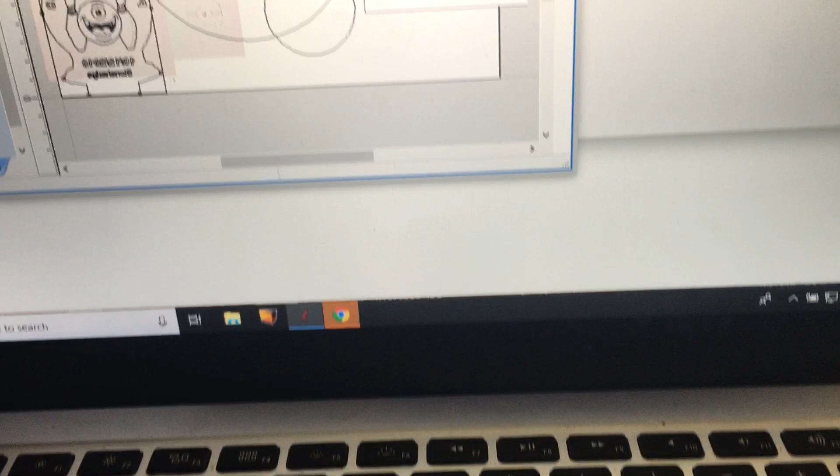Hi there, my name is Robert, and on our group, CNC for Beginners, I had some questions about how I was making my LED backlit signs. This is not going to be a professional level thing, but I thought I would share how I did it. I use Aspire to do my drawings.

This is my second CNC machine. It's a Shapeoko XXL, and I am super happy with it after having it running now since midnight last night. It's now noon, so I've had it running for 12 hours and I'm super happy with it. So let me tell you about making these LED backlit trophies that I'm making. That's the design I'm going to do right now.

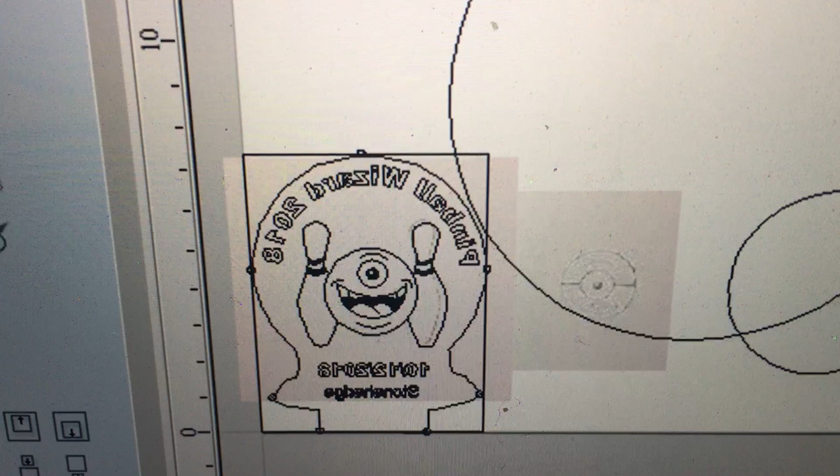Okay, you can see a box around it, 4 little dots here, there, or 5 or so. Okay, I'll explain what those are. Let me get the mouse up here. There's a box around it. There's the trophy outline. There's the lines. There's the words.

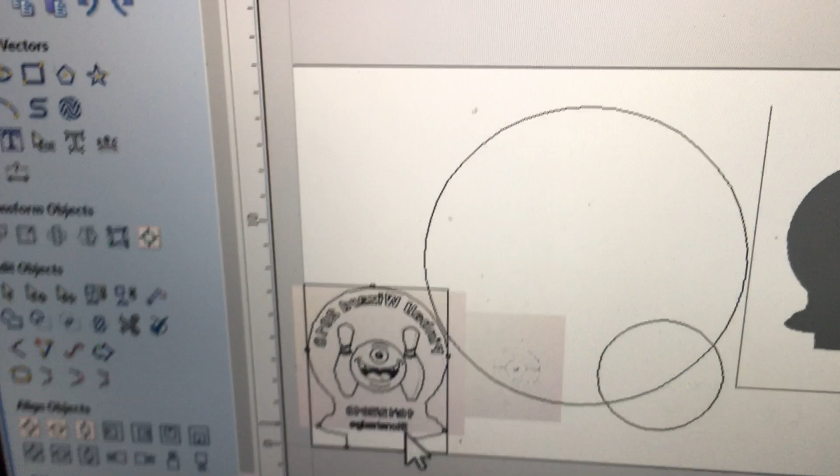Now, what I did, I had to make a full dozen of these over the course of the year, one a month for this pinball tournament that I run. So this is going to be my 10th one. Not knowing how to really do it, what I did was I ordered a case of trophies in this shape from China. Shipping on it was like 70 bucks. Got here in a couple weeks.

Okay, each one comes with a base, USB cable, a remote. The base changes colors, has 7 or 9 LEDs in it, and it comes with the trophy already cut to shape. Now, one of the first things I learned, and the reason I have to do the little drawing, is that the trophy itself is not symmetrically cut.

That's the right way. If I flip it over the other way, the left side is low and the right side is high, or vice versa. It doesn't line up the same when you flip it over. So one of the first things I learned is that these things are not symmetrical. This right side sticks out farther than the left side. If you look at it there, you can really see how it's not symmetrical.

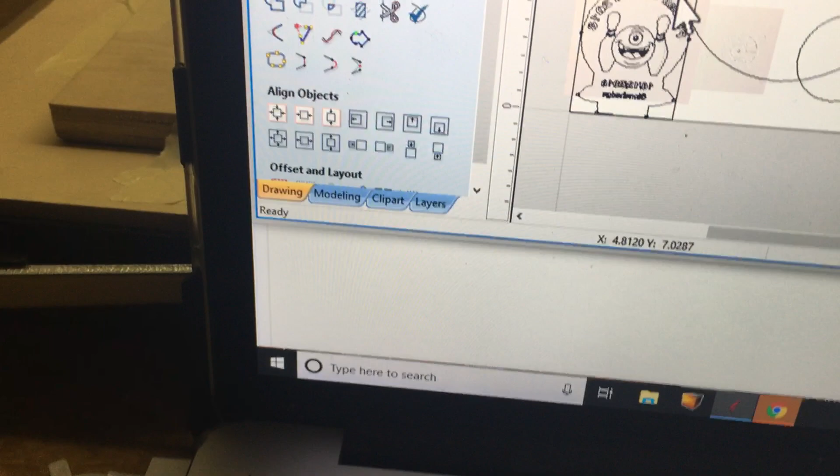See if I can make it zoom. I normally use a mouse, but I don't have the mouse down here right now. This is in my basement. Okay, that was interesting. Okay, I think if I hit this, it centers it again. Alright, well, there's the design.

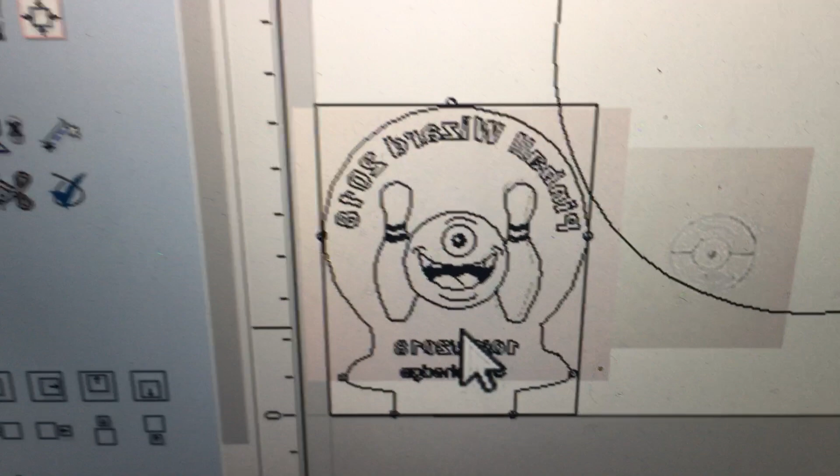Now, in Aspire, you go over here and you make your tool paths for what you want it to do. I'm going to click this so it stays open. Okay, and I already have the tool made. Quick letters, that's going to be those letters. Monster, this is a pin monster. That's those lines. And there's the trophy outline.

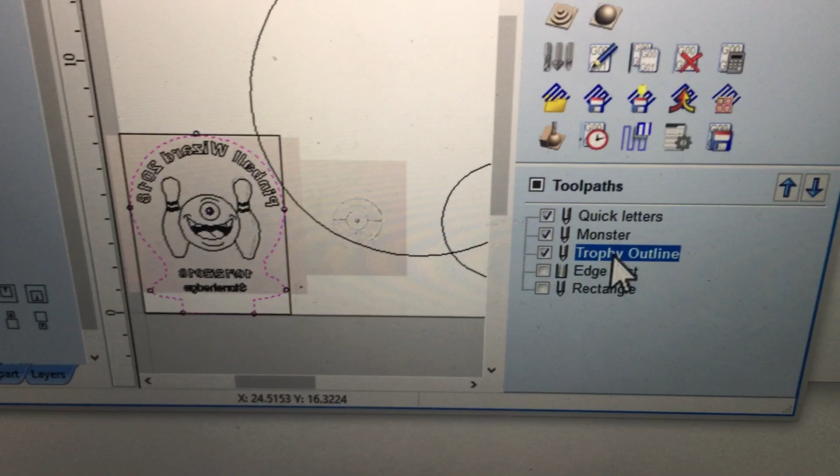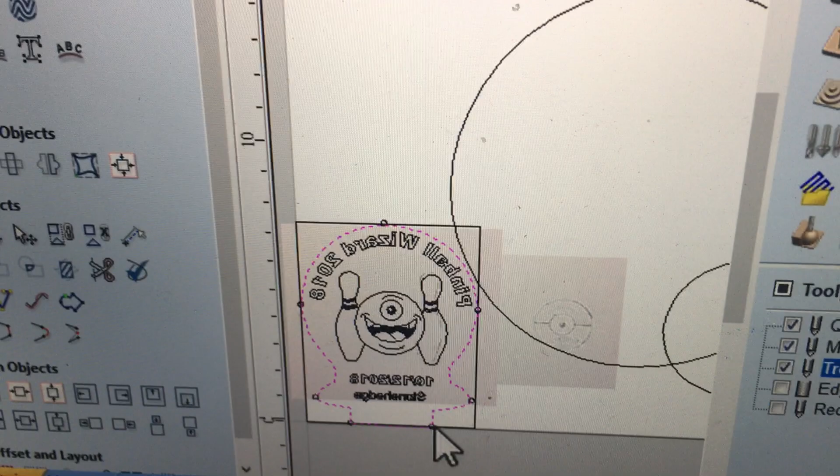Now those circles I made right there, I will also sometimes export that, set my Z up a little bit extra high, and then run it through a drill program and watch. This was with my old machine. I had to do this because it didn't zero right all the time. It was awful. But that will actually tell the machine to just kind of touch each of those points for me.

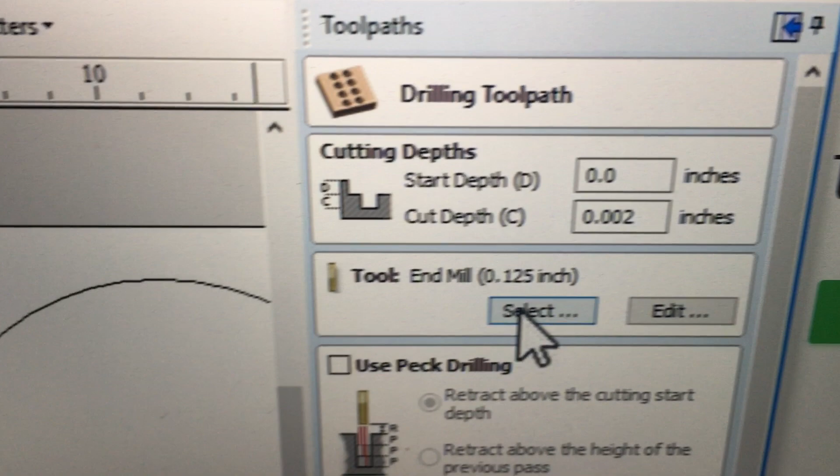And I call that the edge test. Okay, and that's set at 0.002. I don't want it to actually touch anything, so I set the Z up a little high. It's an end mill, it doesn't matter, and it runs through that program, and it tells me that I've actually got the thing laying down correctly.

Now, I did one of these last night. I'm not going to have to do that. I'm putting it in exactly the same place, because on my wasteboard, I actually cut that rectangle, and I cut the outline of the trophy. See that line right there? That's the outline of the trophy. So I line that up ahead of time, and now I know when I zero to the corner, everything's going to be lined up in that workspace.

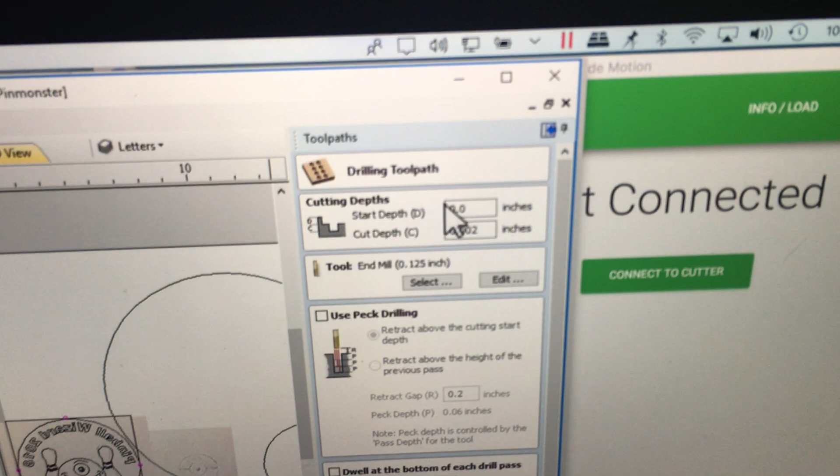So that's kind of my beginner, make sure I do everything right thing that I do. Okay, so let's go ahead and close this.

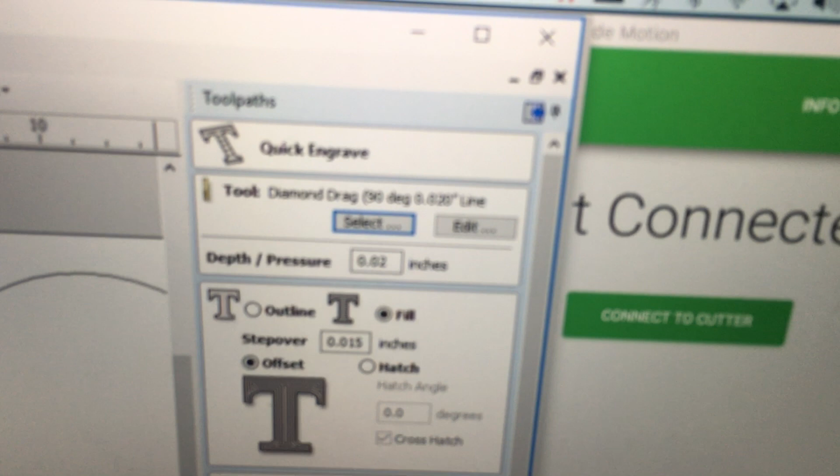Now, the quick letters, that's actually this toolpath, quick engraving toolpath, and it is set to 0.02 inches, fill, 0.015 inches step over. Now I'm actually going to export this in millimeters, so it'll do all that conversion and stuff for me. The bit I'm using, you have to tell it what bit you're going to use, and

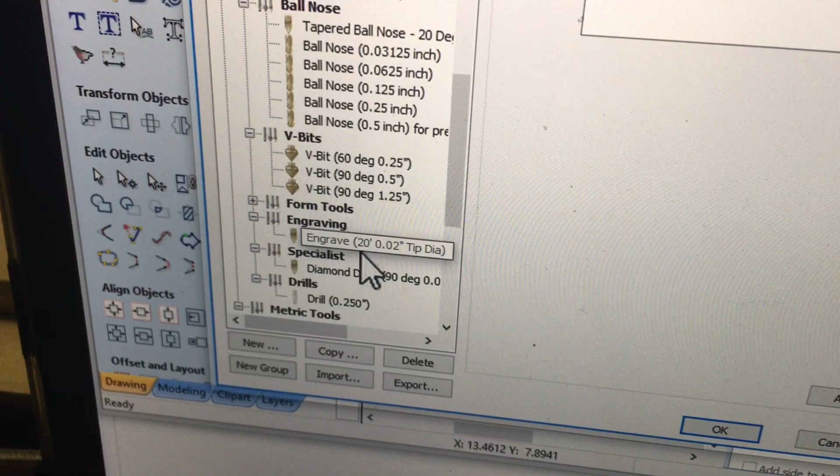if you go to select in this program, come over here and you got all these bits to choose from, and down here in engraving is the diamond drag 90 degree, and I actually had to import and make that, and I don't have time to tell you how to do that right now. So I'm going to cancel that because that's already what I want.

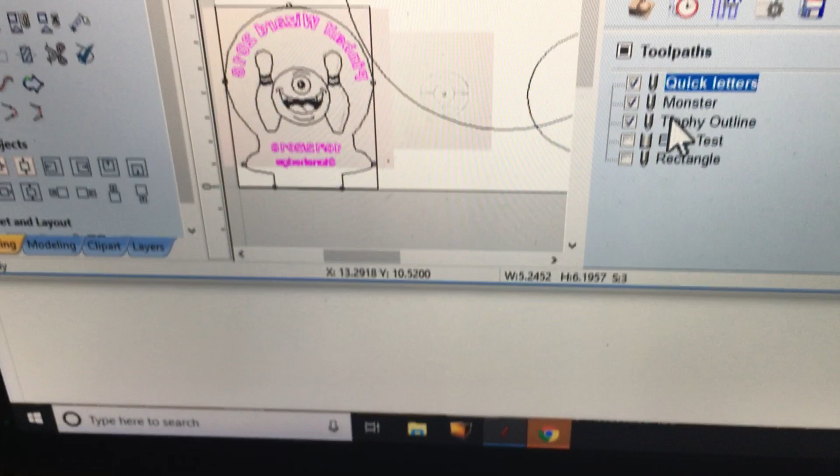And then what you would do is you hit calculate, and it would calculate that toolpath for those things that are pink right there. Okay, don't need to do that right now because I've already done it. Then the monster toolpath is the same tool, same depth, 0.02 inches, but it's an outline. So it's just going to draw the outline of those things.

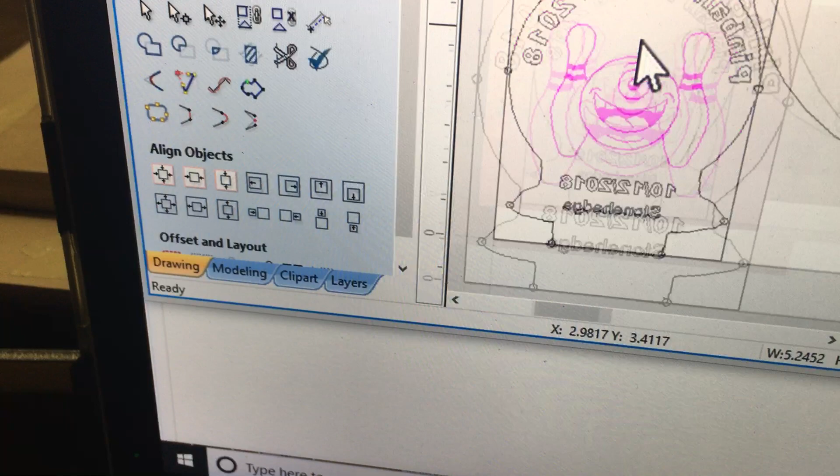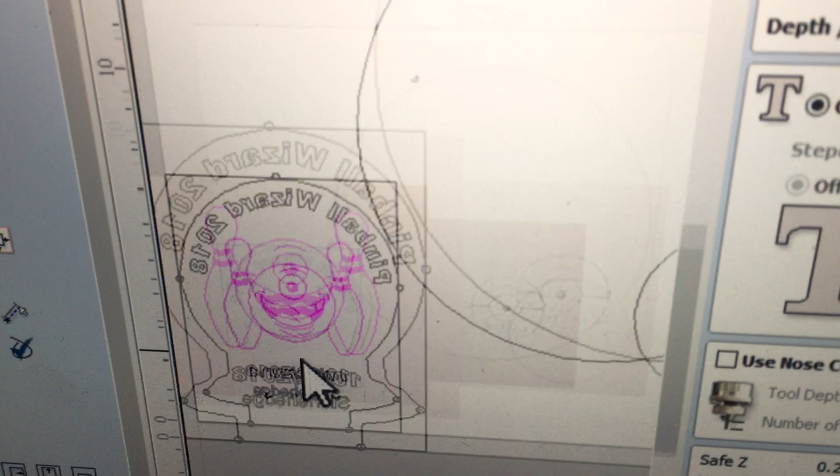And when I did this, boy, it's really hard to do this with a mouse. To do the lines there, I actually copied this top line and nudged it down and moved it down, and then made all those lines by hand. Same thing with the eyeball up here. Okay, so those are not a fill, those are actually individual lines that I drew for this area, and that area.

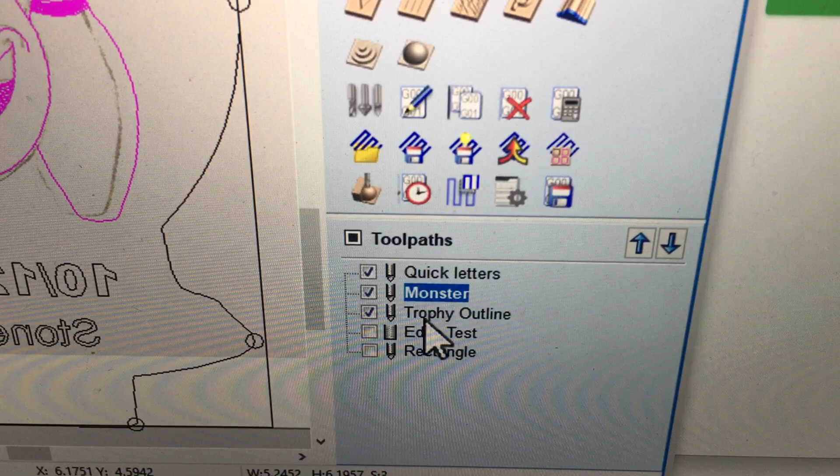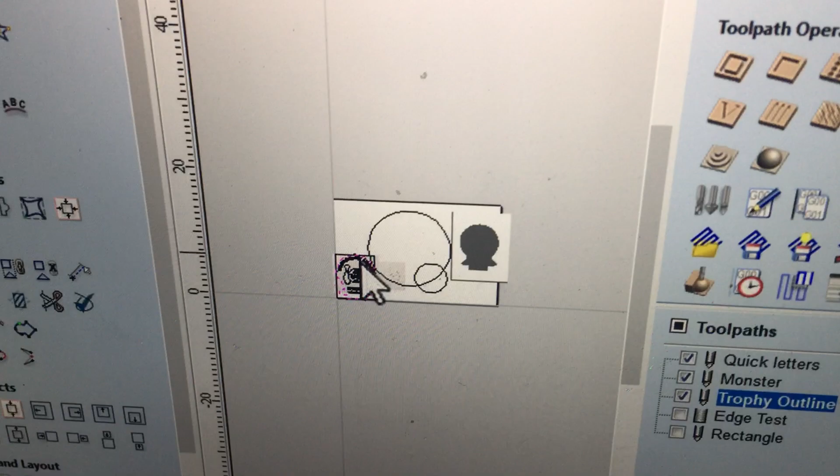Okay, and so I made that quick engrave outline, and went ahead and named the layer monster and all that, calculated it, and then the trophy outline. I always leave the trophy outline on there because that helps me make sure that the work area is defined the way I want it to, because I also work on vinyl records and do other stuff, so it doesn't export your entire work area. It only exports the work area of what you are working on. So I make sure I do the trophy outline so that it has the work area that I want.

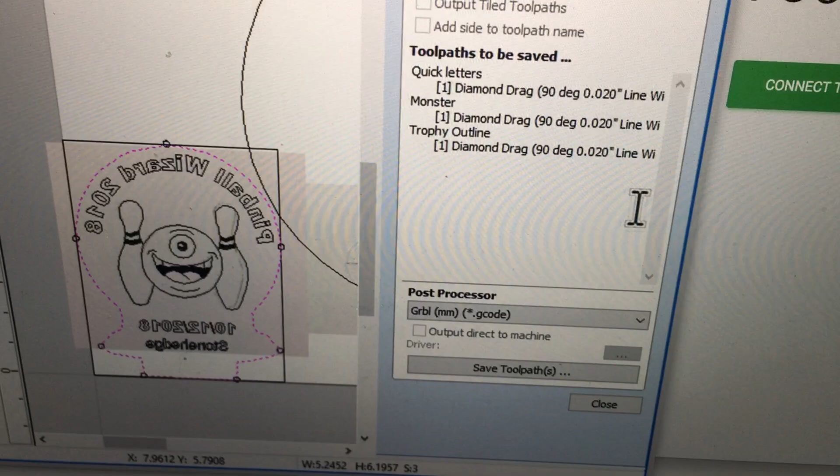Okay, so when you're ready to export your toolpaths and send them to the machine, in this program you go to the Save Toolpath, you click that, you then look at the toolpaths that you want, and let's close this here. Okay, so I have quick letters, monster, and trophy outline. Now this also does it in the order that you have them listed here. If I wanted to do the trophy outline first, I would move it up to the top, but I'm actually not even going to run that.

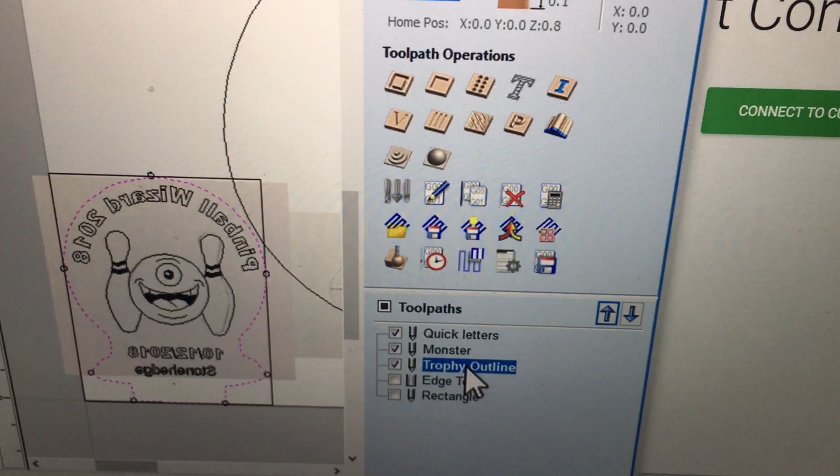I'm going to stop the program when it finishes with the monster, and then the trophy outline itself is just there, so that I stop the program at that point and don't run that. It doesn't necessarily hurt to run it because I have it set so it just barely even touches the surface of the thing, but I don't actually want that to run, so I have to be here to shut it off when it gets to the trophy outline.

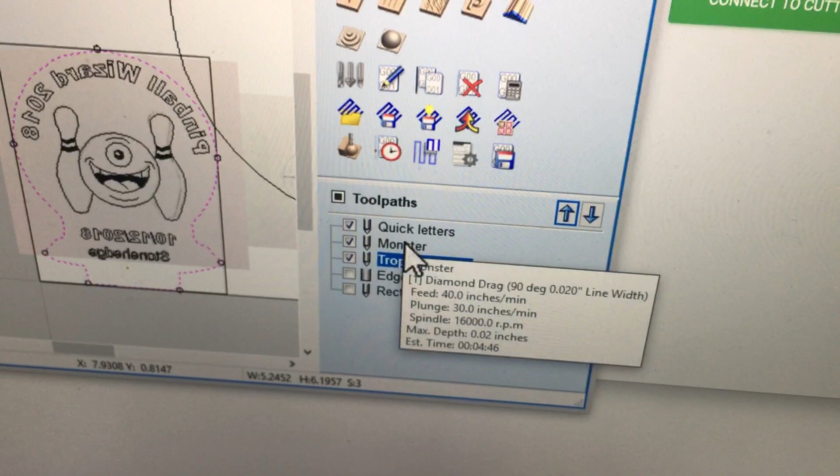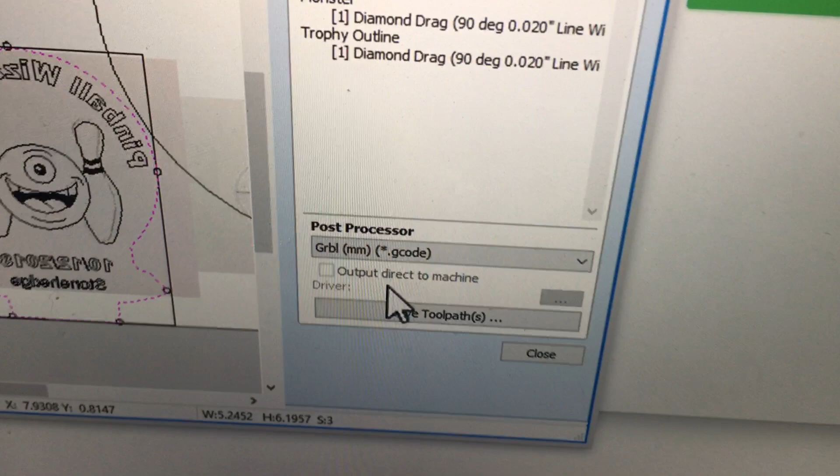Okay, so I've selected those three things. I go to Save Toolpath. It's going to tell me the three toolpaths I want, and they all have to be the same tool. I want to output all of them to one file. Okay, and then I would hit Grbl millimeter G-code for this machine. You would do whatever you need for your particular machine.

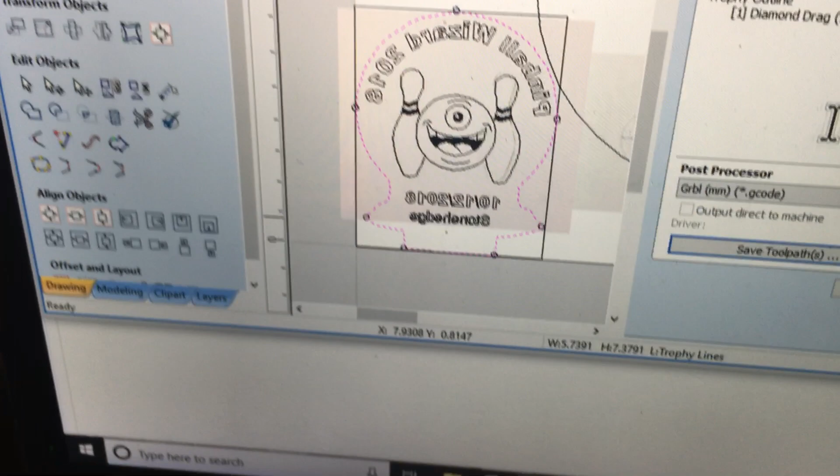Save toolpaths, and then it's going to put it in a place, and I've got it here as the October Stonehenge Trophy, which is what this trophy is titled. Okay, and then you would hit save. Now don't need to do that because I already did that and it's all ready to go for me. So then you go to your Carbide Motion for the Shapeoko. All right, I'm going to clear off my workspace here.

Now I'm doing this for rank beginners who have even less experience than me, which has got to be a pretty good beginner, but people have been asking some pretty pointed questions, and I thought it might be helpful to share what I have learned over the last 10 months of fighting with an inferior machine, and now I have this wonderful machine that just does everything the way I want it to do.

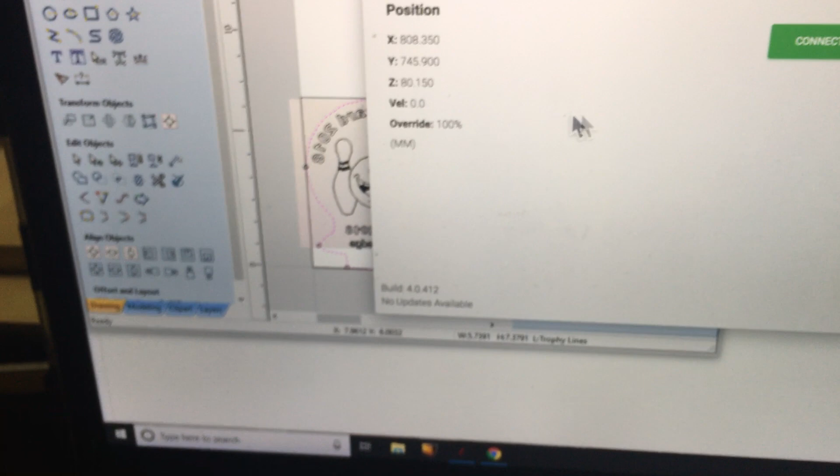So I have to turn on the machine, and it will react over there when I did it. It made a little clunk and says, okay, it's happy. Okay, and I'm running a Mac, and I have Parallels going, and I want it to connect to the Mac. I don't want it to connect to the Windows. Okay, so then I connect to the cutter. Okay, it found it. Now, I'm going to, just for fun, go to the jog program.

Okay, I have to initialize the machine. It's not just for fun. And it's going to go through the homing cycle. So it's over there. It already moved up to the Z-axis. And it's homing. It's reminding itself where 0, 0, 0 is. And that's an important part of the process.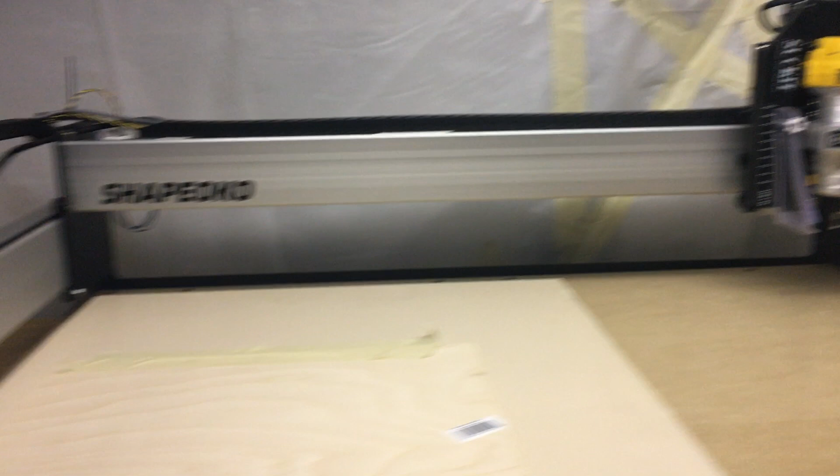Then I can go to rapid positioning. And this is northwest, north, northeast. This is coordinates on the full-size board. So when I push this button right here, the machine's going to just come right over to me.

That plexiglass hanging down there is for the socket, which we don't need for this particular process. I brought it over here to me, and you can see that I have the diamond drag bit already installed.

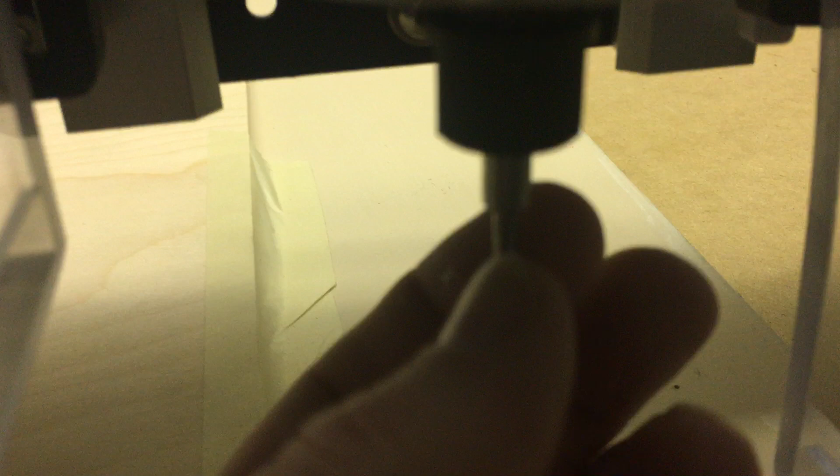It's right here, and it's still got the dust on it from last night — that's just loose dust. I'll just wipe that right off.

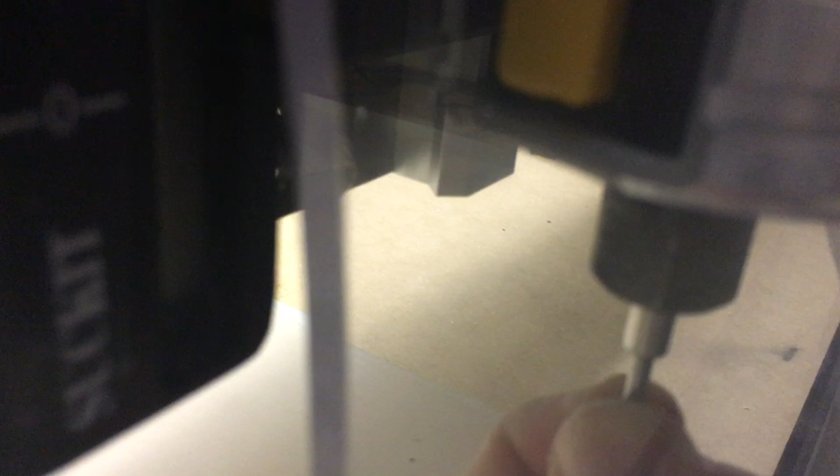This is spring loaded — you can see it, spring loaded, moves in and out, so you don't have to have your zero and everything perfect. It works on uneven surfaces and keeps a constant pressure based on the spring loading.

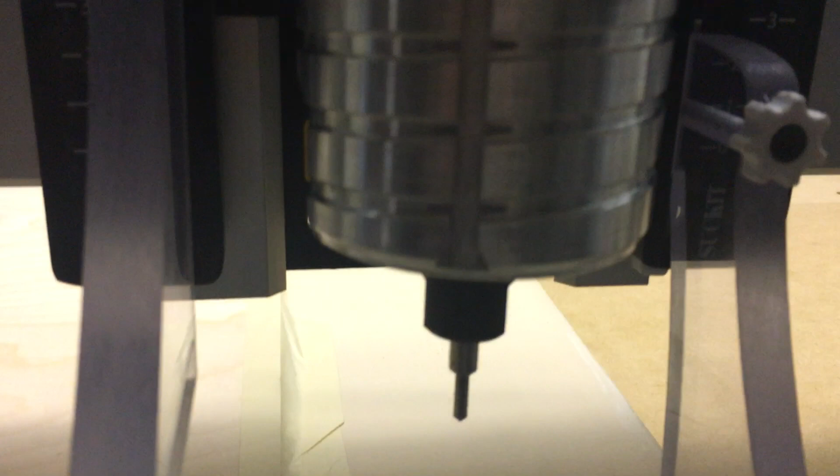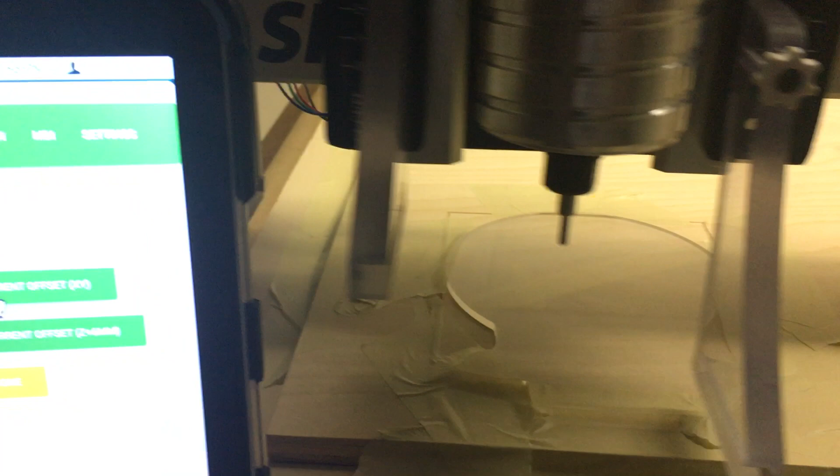Now I'm going to manually zero the machine. Actually, I can tell it to go to the current offset of XY, and it's going to go over to where I had it zeroed last, which should be the corner — right there on the corner.

I'll take my thumbnail and push in the tape — that's way down here actually. Sorry, like I said, this is for beginners. There, right there is the corner of that box that I have etched into my wasteboard.

Now I'm going to go ahead and go to current offset of Z, and it should just go right down there — it says plus 6 millimeters, so it's going to stop 6 millimeters above where I had that X before. Now I'm going to get off of the rapid positioning and go to the regular positioning.

For the Shapeoko program that's here, you can go 0.1 millimeters, 1 millimeter, or fast — with fast, it just moves as long as you hold the button down. You've got to be careful with that because you don't want to cram anything into anything else.

So I'm going to get down back there close again. I'm confirming now that it doesn't look like it came back to exactly the same spot, so I'm going to change my increments here to 0.1 millimeters.

I actually drew on my wasteboard, since I'm still new at this: Y minus is this direction, X minus is that way, X plus and Y plus are that way, until I get used to this particular machine.

So I'm going to hit the X plus button right here. Every time I tap it, it's going to move 0.1 millimeter. It doesn't even — you can't even tell it's moving, it's going to move so small. Tap, tap, tap, tap, tap.

Now I've built into my design kind of a margin for error on these trophies. They don't have to be perfect because nobody's ever going to notice.

I'm going to Z minus, and I'm going to go down and make sure — I'm actually going to touch that. Now, that Z, my Z0 is actually not this point. So see, I'm right down there nestling into that corner. I'm happy with that corner.

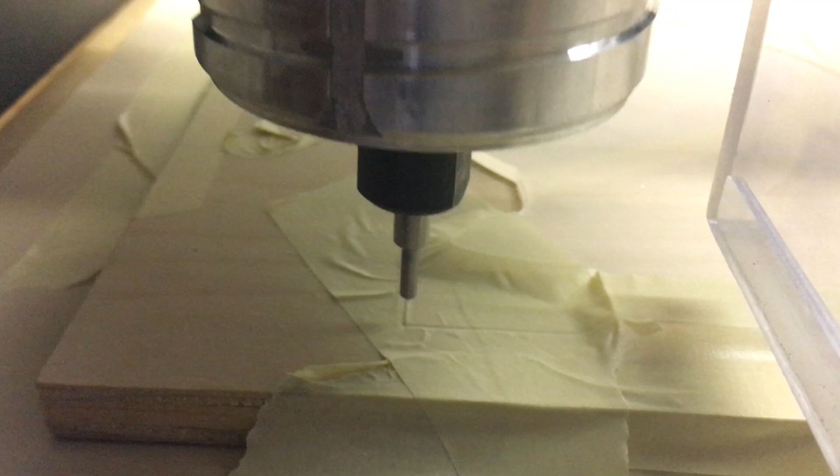Now I'm going to go back to Z plus. I'm actually going to go back to a full millimeter at a time so I don't spend all day tapping, and I'm going to send it back up again. Okay, so that is X and Y0.

I'm going to go to fast now, and I'm going to move back over here. I want to show you — I'm going to move back over, and where I actually zeroed my Z0, that's hard to say, is over here. So when I hit the Z minus...

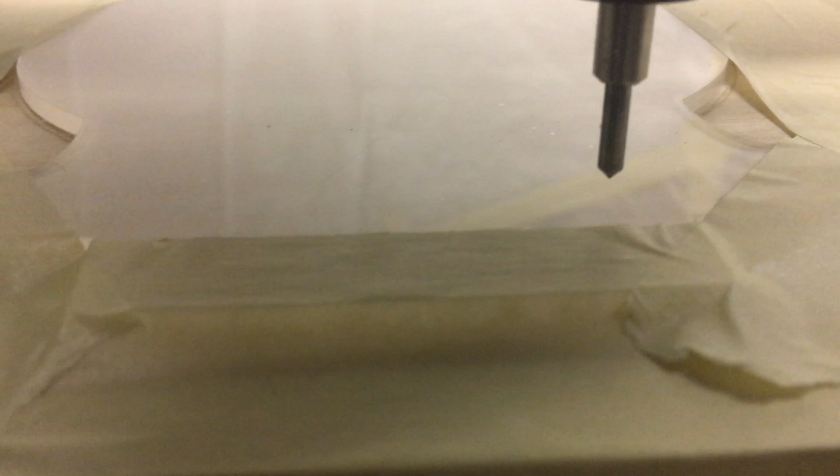Now I'm going to go back to rapid positioning again, and I want it to go to the current offset of Z plus 6 millimeters. Okay, and that's actually where it is.

So when I go back to this again, increment plus, minus — excuse me, 1 millimeter — I should be able to tap it 6 times and it should come down and actually touch. I'm going to zoom it 1, 2, 3. Well, that's moving fast — this is why you confirm it each time you do it. I want it to just touch.

There, it's just touching. Okay, now because I have this spring-loaded thing going on here, I want a little bit of room to grow on. So I'm going back to 0.1 millimeter again, and I'm going to Z minus it.

2 more times. Okay, now when I go back to rapid position again, it's actually going to tell me that I'm at X 100.1 millimeters, Y 22.25 millimeters, and Z 1.8 millimeters. So I'm actually still above where I had it set last night.

So if I go back to 1 millimeter, hit Z minus again. Okay, now it says 0.8. I'll go ahead and hit Z minus again. Now it says minus 0.2. I'll change my increment to 0.1.

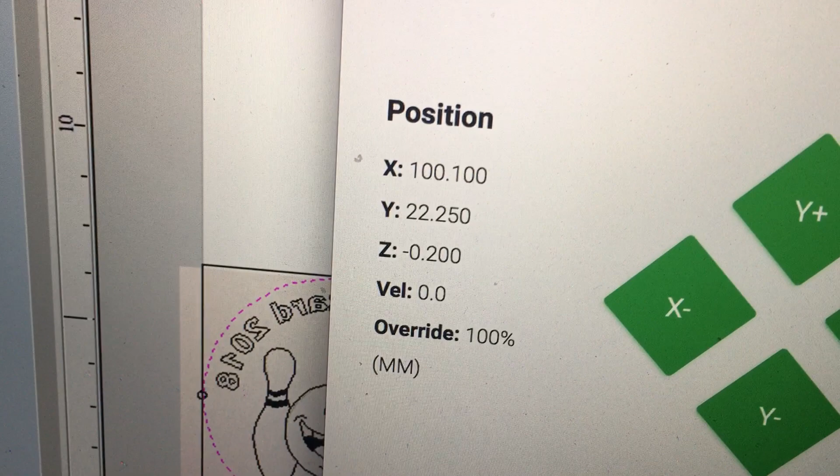Z plus, plus. Now it's exactly where I had it zeroed for the one that I made last night. And that's actually deeper than where I had it last night. I don't want it that deep. So I am going to go back up to 2 again.

And I'm going to look really close. Yep, that's definitely touching over on that side. Now, I haven't finished my wasteboard or anything yet. I need to get these trophies done. So I needed to just go in and do it.

So last night, this side was a little higher than this side, and so I zeroed it over here on everything that I did. So I think I've got a low spot in my board on this point right here. That's why I'm zeroing it way out here for the Z0.

Now I'm just gonna go. So it's actually zeroed. It's at 0.2 now. Okay, I'm gonna hit set 0 here, and I'm only gonna set the 0 Z. Now that's the new 0 point for Z, but the XY 0 is still over here to the left at the corner of the thing.

So when I hit done, go back to fast, I Z up. When I go to rapid positioning and I go to current offset XY, it's going to take it over to that 0 point. Current offset Z plus 6 millimeters is going to take it down to there.

Now see, that 0 point is actually way above the surface, but it's in the corner where I want it. So the machine now knows that the flat plane is there, the top of the Lexan or acrylic, and the XY0 is over here. I know that was a long explanation, but it sure would have helped me if someone had explained all that junk to me when I started.

So now we'll go back over here. We'll get out of the rapid positioning. Okay, now an interesting thing to know about it is that at this point, seriously, now that I've set those points, it seriously doesn't matter where the machine is when you start the program.

So I'm going to load a new file. I'm going to go over here to desktop. Okay, I don't want you guys to see what's on my desktop, so I'm going to hide something, I'm not going to look at it for a minute. Okay, yeah, there's nothing there. It's personal information. So I'm going to double click the October Stonehenge.

Okay, and it's going to tell me that it's good. That's how big the file, how many millimeters it overall covers. All right, so the next thing, all I have to do next is go to run. And I didn't talk about feed rates or any of that kind of stuff in this. This is just the process of making the thing.

And then I'm going to hit start. Now, as you can see, it's just out there in the middle of everything. I'm not going to show you clicking start. I'm going to show you what happens when I do it over here. Now, the spindle doesn't have to spin because this is a pressure and a drag.

You're scratching a diamond across the surface is what's going on with this 90-degree diamond drag bit. You're dragging a piece of diamond across the surface. There's no spinning. It's nice and quiet. Not a lot of dust gets kicked up. And now I'm going to click start, and this is what happens.

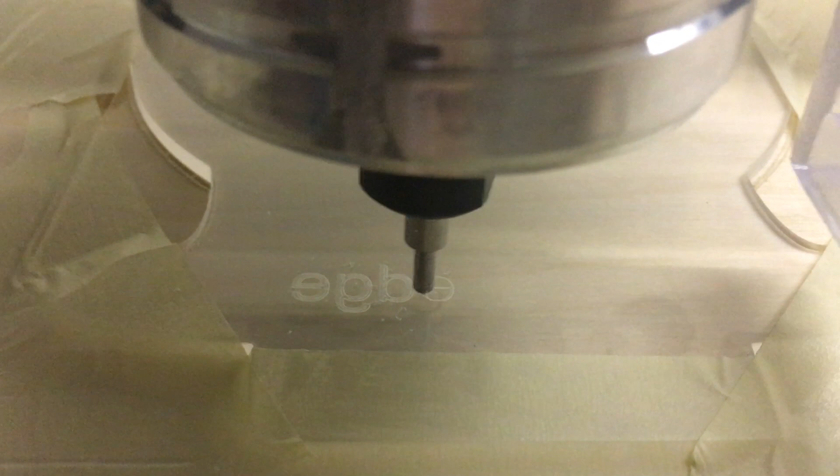Okay, the one that I made last night, I wasn't entirely happy. I had the offset set at 0.02 instead of 0.015. And these smaller letters down here didn't really have a good etching in the center of them. I should get that out and show it to you, but I'm probably not.

But now you can see that it's actually filling it in. What it did was it made an outline, and every once in a while it stuck another line in the center of it. So I figured about a 25% change in the line spacing would not make it too close, and it would make these smaller letters go. The larger letters looked pretty good.

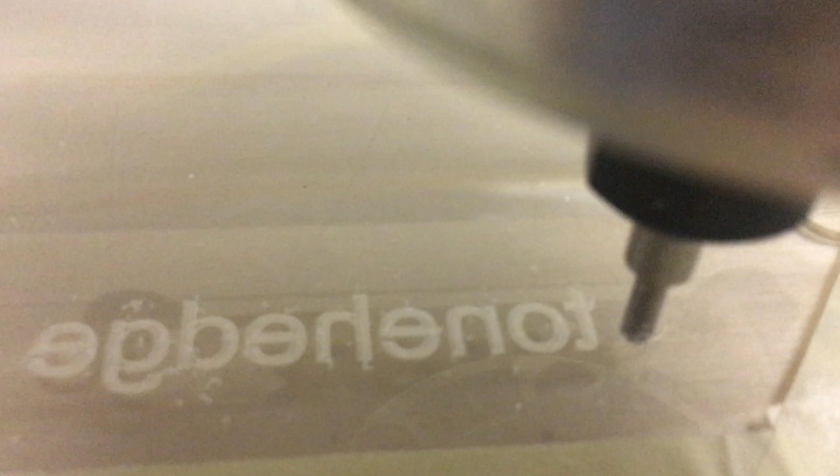There were a couple of gaps that I didn't like, so I did 0.015 for both the large and the small letters. As you can see, it's printing backwards because when you mount the edge-lit acrylic onto a base, the stuff on the back can't be seen, but when you touch the front, it's nice and smooth. All the scratching goes on the back side, so you take everything and flip it over, flip horizontal to make it the right shape.

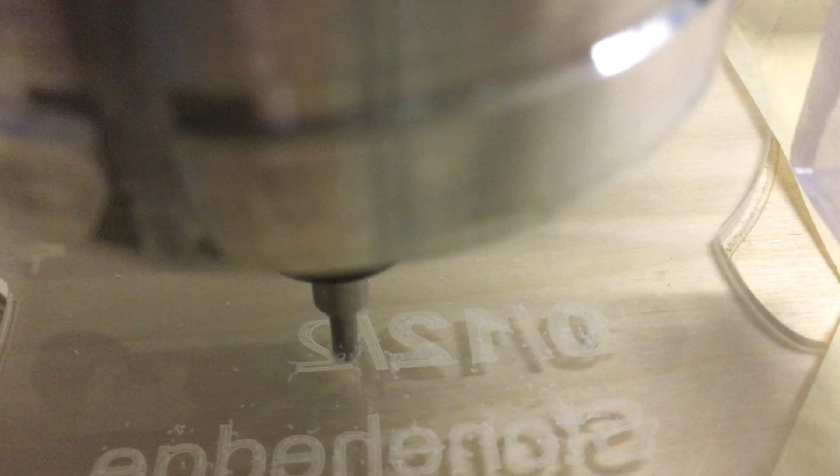So what we've printed so far is Stonehenge, and now the date the tournament is on - well, that says 012. Why does that say 012? It should say 1012. Did I leave the 1 off the file? That would be dumb. Let's see. Nope, it's got a 1 on the file. So it's supposed to say 10/12/2018, and it says 012. I guess hopefully it's going to go back and do that 1 later. That would be something the machine decided to do for some reason.

I love these edge LED signs, and I'm going to be designing lots more, I've got all kinds of ideas. Now it's going back and doing the 1. See that? Don't panic if it does weird stuff like that. I have panicked before and stopped the thing.

Okay, now it's going to go out, and the name of my tournament series is the Pinball Wizard 2018 Championship. So the top of the trophy is going to say Pinball Wizard, and like I mentioned before, the 0.02 step for the fill, I didn't think was completely wonderful, so we're doing a little bit of a tighter thing for it.

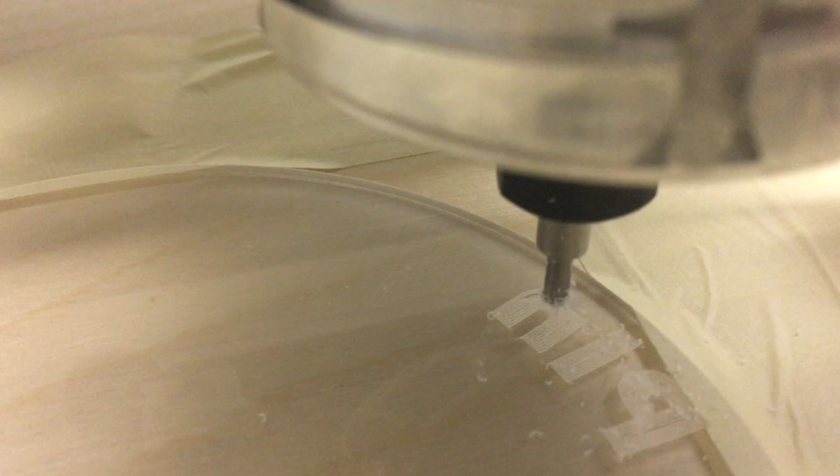Another thing - make sure you notice how very small on the edge the tape is, because the tape will actually interfere with the diamond bit successfully scratching into the surface. It hits the tape, it messes things up. I thought it would go through, but it doesn't go through very well. I learned that the hard way too. So we're doing 0.015 offset to make the letters this precise.

Okay. And what was I saying? Pinball Wizard 2018.

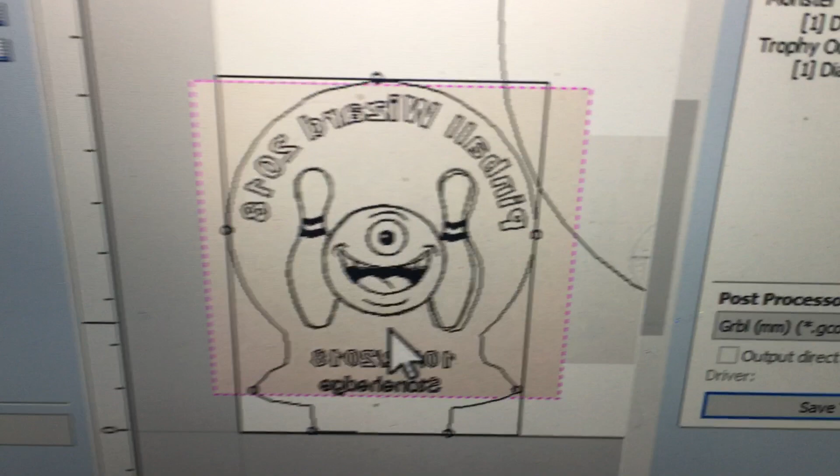I don't do a scanned image and then have it trace the vectors for me. I've always found that to be way too sloppy, so I actually hand draw everything in the program itself. You can import - when you import a bitmap, it goes onto the bitmap layer. Okay, right there, and I click on it. You can see that's a drawing that's there. And what I do is use the drawing tools in the program to actually trace over the drawing that the artist Ken Scott made.

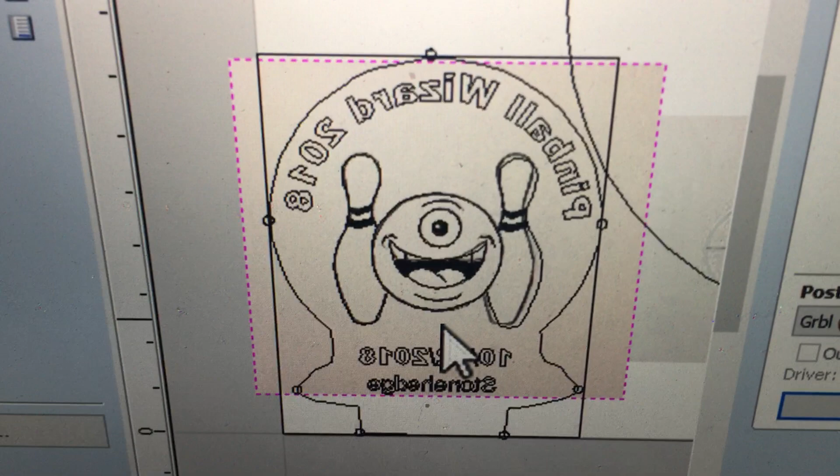Special props to Ken Scott for these hilarious drawings he does for us. I have to trace over them again - I'm getting better and better at it every month. I've done 11 of them now. This is number 10, and well, this is number 9, and this is number 9. Number 10's already been done too. That's the one I'm going to do after this.

There's ways to trace it, but I think they look too sloppy - they have all kinds of rogue points in them. So I draw everything by hand in the program itself. Just my perfectionism being exhibited. I don't like sloppy work, so it's way more precise if you draw each vector yourself.

You just have to learn the program. You have to learn how to control curves. It's got some really good... whatever program you're using, you need to learn it and make the curves yourself, and not try to just be sloppy and use the filters and stuff, in my opinion. Okay, we are up to 2018.

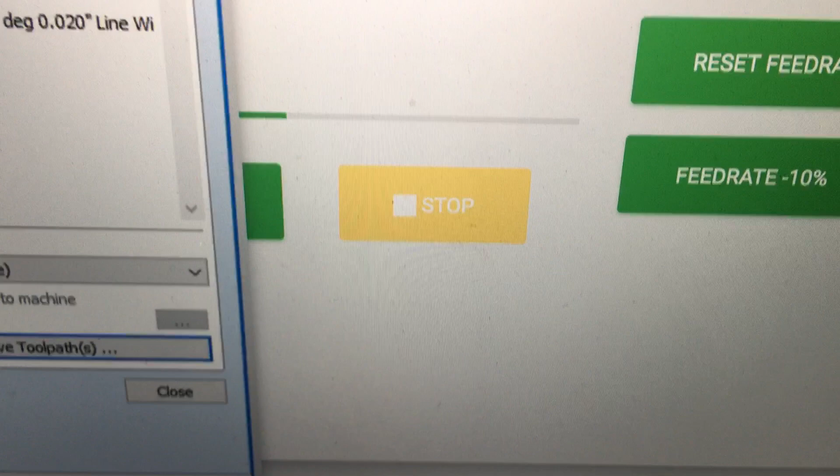At this point, it doesn't take very long at all to draw the pin monster, so I'm going to make sure that I have my mouse. I usually, when I'm running something, have the mouse hovering over pause, and I have a wireless trackball mouse that I keep in my hand, and I'll use that as a safety switch. Keep with this - really not needing it.

Okay, now it's drawing the bowling pin. Stonehedge is a bowling alley that has pinball machines, and some of the best pinball players in the world play there, so we did a bowling theme for the trophy for this tournament. Every tournament has its own individual custom-made and designed trophy. So I drew each one of those lines individually, copied and pasted, moved it down, and then just incised them.

It's not doing a fill right now - it's actually tracing an individual line one at a time. Frankly, because I couldn't figure out how to make a fill between those two curves. There's probably a way to do it, but this way works just fine. Okay.

So now it's drawing the eye, which what I did to make that is I took the first circle, and then I offset it a little bit to one side, offset it again, copy paste, offset, copy paste, offset, copy paste, offset, and then I deleted the lines that were outside the circle, so it made the eye look like it was looking off to the side like that. Alright, so now it must be working on the mouth.

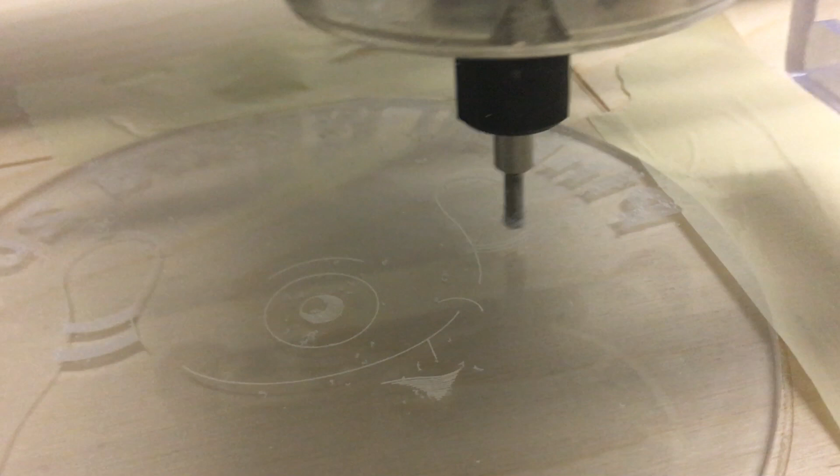You can see that the tip is starting to build up a little bit with that white plastic, but that's a very soft powder I found out. It doesn't need to be cleaned off or anything. It's not interfering in any way. Sometimes when you're cutting with a spinning bit, the plastic will melt, stick to the bit, and then start scratching the acrylic around the cut that you're making. You do need to stop and clean that stuff off, but this stuff doesn't seem to need to be cleaned off.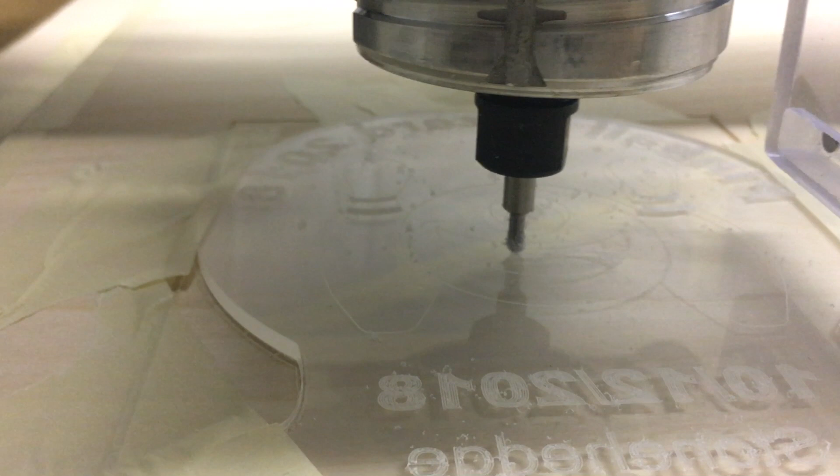Okay, I actually do have a base I can set this on so you can see it lit up when I get it finished. It's not the base that came with it, it's a different base. Okay, it's almost done. I'm getting ready to hit pause. It's going to come over here to this corner and start drawing the outline of the trophy that I have in there for my workspace. And as soon as it starts moving that way, I'm going to hit pause. The machine will go up in the air and go to a parking position, and I'll hit stop, and then it will home itself, and we will be done.

So it's working on the mouth now. I am so much happier with this than the other machine that I had. The other machine that I had cost about $900. It was a home kit that you build out of wood. This is a home kit that you build out of metal. And I am so much more confident. I actually have an appointment that I have to leave for in 15 minutes, and I never would have even imagined attempting to make this trophy on the other machine in the amount of time that I've been doing this. This video is 31 minutes long right now, and that's partially because of the time I've spent explaining every step instead of just doing it.

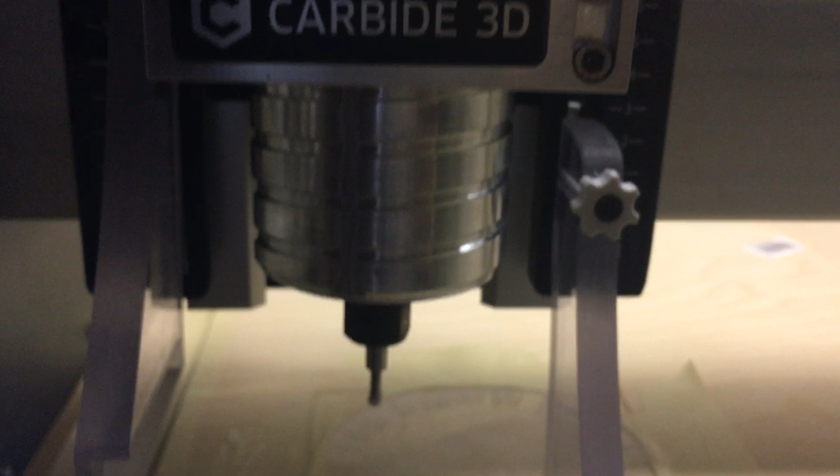There it goes over, I hit pause. Okay, it's pulling away, and then it's going to sit and park itself. And if I hit resume, it would go back down again. So that was my safety. It's completely done, and it was going to start drawing the outline. So I hit that right there. Now when I hit stop, the machine is going to, I think, home itself. Go home, put itself away. Nice and calm. All right, now there we have it all done.

Okay, I'll just pull up the tape. You need to not leave the tape on. Some tapes will etch a residue into the acrylic. I actually found that painter's tape did etch into the acrylic and cause a real hard time getting off. There's a little bit of residue left there, but it didn't etch it. This is just tape from Home Depot that I bought, dozen rolls of it or so.

I used the tape and super glue method to hold my wood down. So this piece of wood is taped down, but this spoil board is actually two layers of tape and super glued together, so that I can pull it off and move it when I want to. And I only did part of it because sometimes I may want to do a thicker wood. This is a build-up so that I can do this stuff.

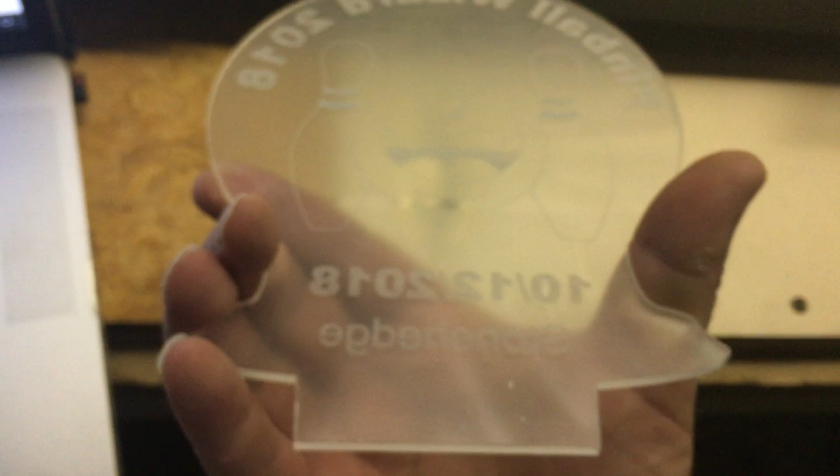So this is the finished product. Here it still has its protective tape on this side, so it makes it look a little bit diffused. I'm going to go ahead and set this down and brush off the residue. So I just have a moderately soft brush like you get with a cheap dustpan brush, and that helps clean off the little bit of residue there and break any free that's actually stuck to the etching.